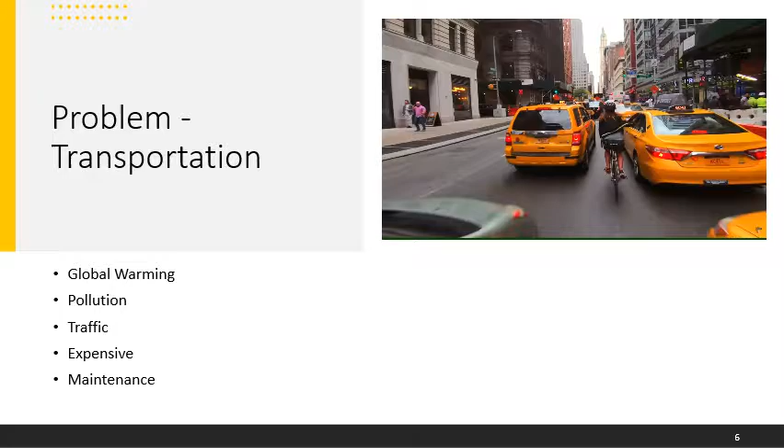Global warming is an issue that is trying to be resolved in many countries, but the main problem is that not many individuals take the initiative to go green. The main problem with cars in big cities like New York, and in our case, Los Angeles, is that they contribute to air pollution. Insurance and maintenance can be very expensive, and at times there are traffic jams where one can spend two to three hours. These expenses add up in an already populated and expensive city.

Although electric cars are already being created to mitigate some of these issues, they still are expensive for the average income.

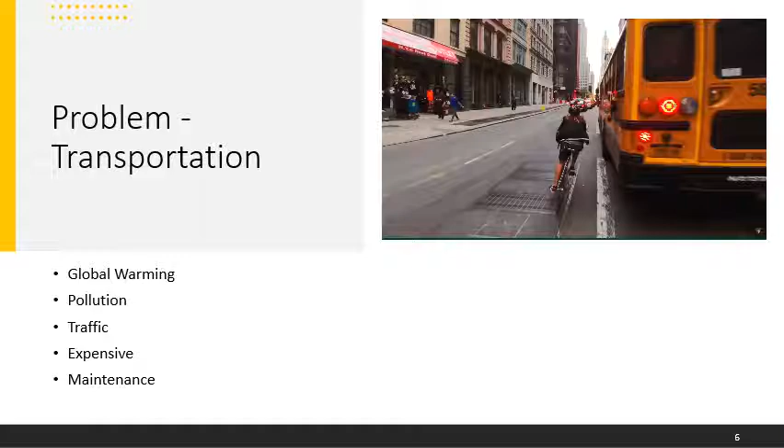The hybrid mobility device was designed to assist and improve a person's daily commute. In this project, the following mobility device will allow a person to travel from one place to another using renewable energy along with human power, which means that we are not only helping the earth, but also helping our own health and fitness. This hybrid mobility device will effectively utilize each source to achieve highest possible efficiency to be a cheaper and better alternative to cars.

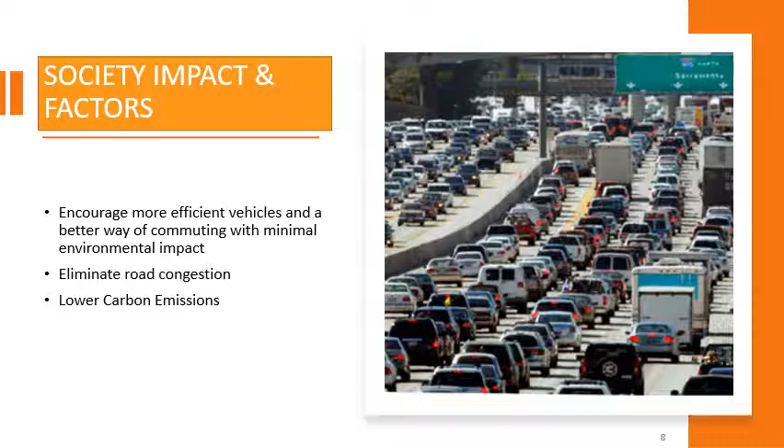Society impact and factors: as we know, the roads of Los Angeles are known to be some of the most congested in the United States, along with New York, San Francisco, and other cities. This project provides a solution to this problem. It encourages more efficient vehicles and a better way of commuting with minimal environmental impact. This vehicle can be a substitute for a commuter vehicle, a solution to decongest roads, which means that if there are less vehicles on the road, there will be lower carbon emissions.

The objective of this project was to create a lightweight hybrid mobility vehicle that would serve as an alternative form of transportation in bigger congested cities like Los Angeles and New York. One of the main goals was to create an eco-friendly vehicle, much smaller and slimmer when compared to our traditional car.

The goal of the power system team was to integrate three different power sources, including manpower, solar energy, and plug-in electricity. This will be achieved by using pedal assist, solar cells that would charge a battery and power a motor, and plug-in electricity that will charge a battery and power a motor.

The objectives for the mechanical systems team was to design a roll cage, perform finite element analysis on the roll cage and on the frame, and to lastly finalize the drivetrain.

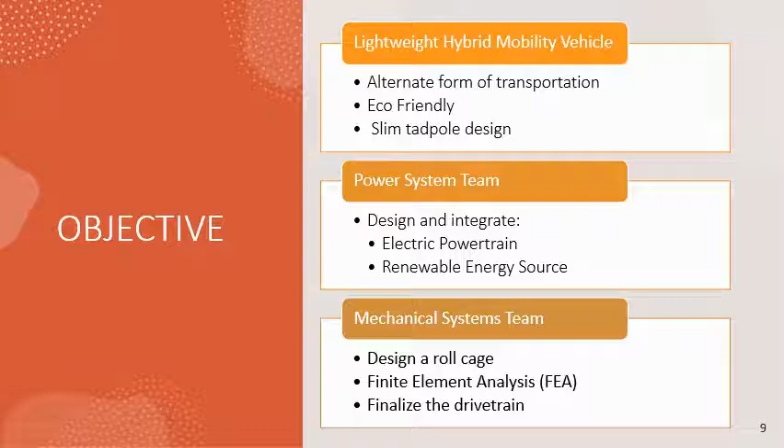I will now hand it over to Christopher to talk about the team management.

We will now go into the project management. We will talk a little about the team structure, along with how the work was divided amongst each team member, and how both teams were scheduled in order to stay up to date with any modifications that were made from both teams.

The mechanical systems team is responsible for the modifications done to the roll cage, along with the drivetrain design. Our senior design instructor is Mike Thorburn, and our advisor is Adel Sharif.

Abdullah Alshammari and Hussam Alzahrani were in charge of the roll cage, along with the seat and steering wheel design. Noemi Lucas was in charge of the finite element analysis, along with other calculations. Christopher Santiago and Christopher Perez were in charge of the drivetrain design.

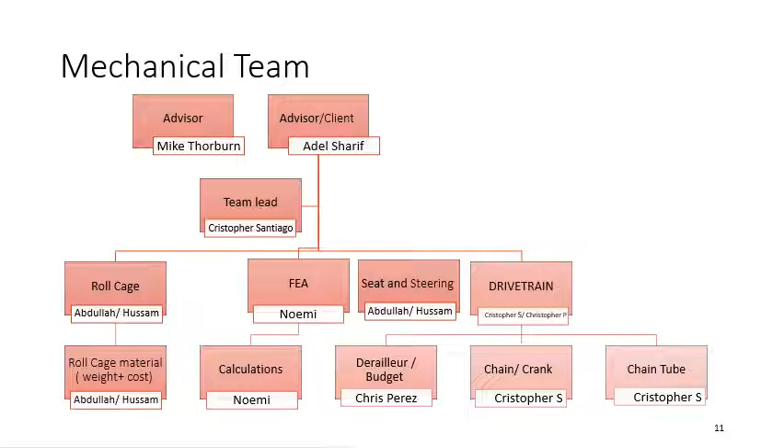For better time management, the mechanical system was concerned about time, and to make sure no member misses important due dates, the team decided to divide the project into 4 phases. In phase 1, the team researched and analyzed the main components of the project. In phase 2, each member was assigned a task so work could be divided fairly. The major accomplishment was that each member successfully delivered their required task so the team could assemble the parts together and implement them into the final design.

In the third phase, the mechanical system kept good communication with the electrical team to consider their needs in our design, such as space for the solar cells, battery housing, and the electrical motor. The main goal of this phase was for the team to have time to run tests and simulations on the design parts, such as FEA or other analysis regarding the mobility device, or redesign if needed.

Finally, the last phase is to present our design and research that was accomplished on the project.

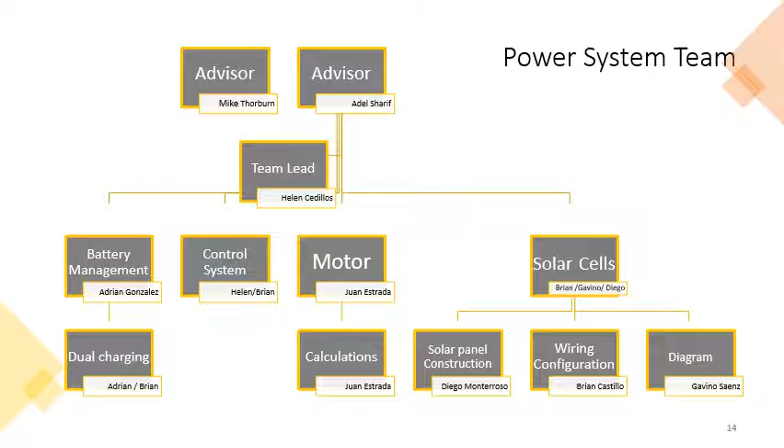The power system team is aware of the time constraint. To help better manage the time, this project was split into 4 phases. In phase 1, the team identified the main components of the electrical design. Once these components were identified, they were assigned to individual members so we could divide and conquer, and we started by researching all aspects of that component.

In phase 2, which was still in fall, the team started designing and reassigning roles for the tasks we began implementing into our design based on the research done. We maintained open communication with the mechanical team to acquire the area assigned to the solar cells, and also to know the exact weight of the whole device so the proper calculations for the motors could be implemented.

In phase 3, which started this spring, the team worked on electrical simulations and also on modifications as we added additional solar panels. We also created cases so components could be mounted properly and adequately into the hybrid mobility device. In phase 4 is where we present our research and design to the Senior Design Expo.

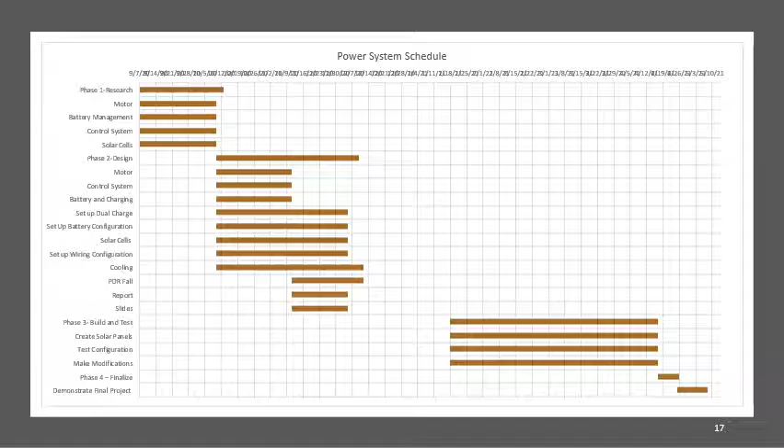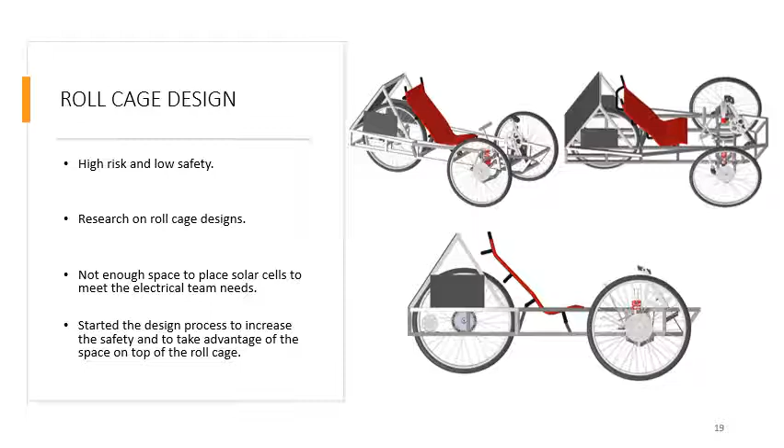The mechanical system team started the research process on roll cage designs to have an idea and build the best fit for this mobility device to meet the electrical team's needs and increase safety. The mechanical system team started the process of designing and building the roll cage, which will be presented by my colleague Hussam in the next slide. It's also worth mentioning that there were a lot of major modifications done on the roll cage design and the mobility device in general to accommodate the safety and electrical team needs.

The purpose of the roll cage is to protect the driver from being injured in an accident, especially in the event of a rollover. It's also to be able to place the solar cells on top, on the back, and on each side of the roll cage.

First, we had to come up with a concept design to guide us in designing the roll cage. We researched how roll cages are built and designed in order for us to successfully build one. Shown here in the pictures is the final design we came up with after many prototypes. This design helped us achieve the final design of the whole vehicle, shown from different angles.

We used mild steel material to design the roll cage and match up with the frame. The dimension of the roll cage tubing is 1 inch square with 0.065 inch wall thickness. One improvement we made was increasing the top space of the roll cage to place the solar cells. We were also able to make the edges of the roll cage curved, to minimize stress instead of having sharp edges, and to look much better.

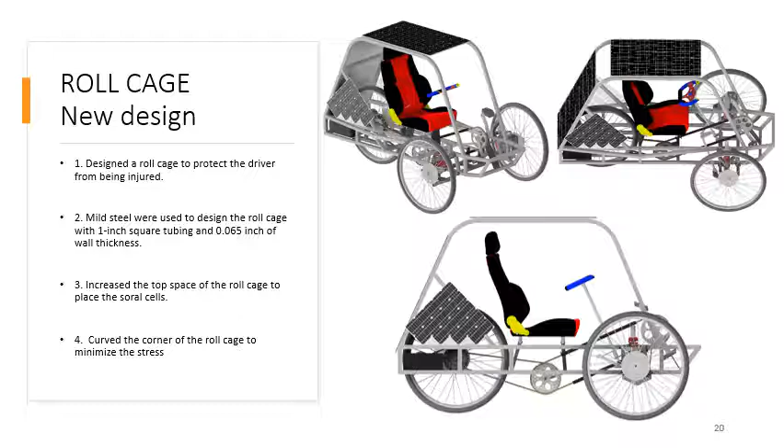Finite element analysis is used to predict the operation stresses and temperature that a component will experience. This analysis has been widely implemented by automotive companies and is used by design engineers as a tool during the product development process. If the analysis is done correctly, it reduces the time and cost of building.

The material selected during the analysis was mild steel, and multiple analyses were done on the roll cage, including front impact, rollover, and side impact.

Mild steel was the material selected for the frame and the roll cage. Seen in the picture on the right is the frame that was welded together using 1-inch square tubing. This material is primarily made up of steel and iron, and is commonly used in fabrication. It has been worked with in many ways for many years, so many practices and processes have been developed around mild steel, making it one of the easiest metals to weld.

Mild steel is also versatile. It's easy to maneuver and bend to your will, and it's less likely to crack, break, or be unwieldy to your demands. In addition, mild steel requires the least amount of personal protective equipment when working with it.

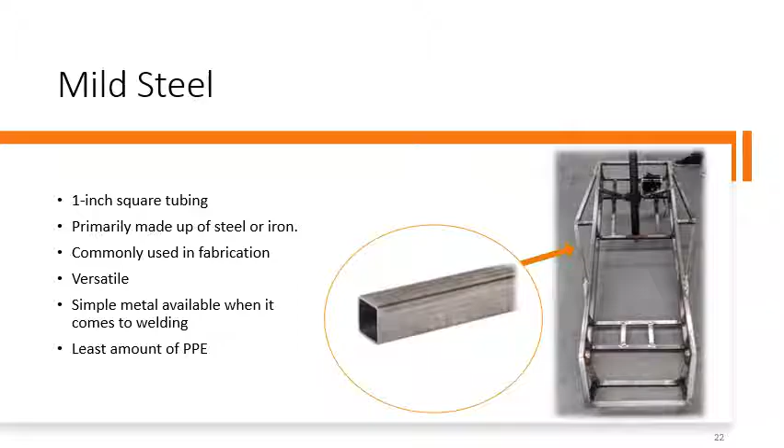Some of the pros of this material are that it's strong, light, easy to modify, easy to handle, and available at a variety of suppliers. One of the cons is that it has sharp edges. In order to do the front impact analysis, we had to calculate the impact force.

To do this, we use the total mass, which includes the driver's weight, to be 400 pounds, the initial velocity, which is 25 miles per hour, and then the calculated work done was 11,331 joules, with the impact time of 0.25 seconds, and the acceleration being 44.7.

The displacement was also calculated to be 1.397 meters, and the impact force was calculated to be 8,110 newtons, and this was distributed in 4 different locations. In order to do that, we divided it by 4, and located it where this red shaded temperature area is, and then the bottom one, and then these two little corners right here.

Now, we wanted to locate this force in the corners as it would impact the whole front, not just this part, but it also depends on the scenario too. The displacement was 0.02145 millimeters, and the safety factor was 7.27.

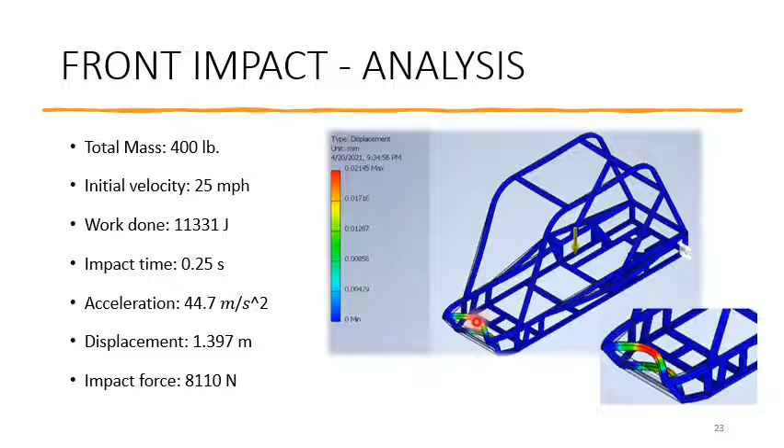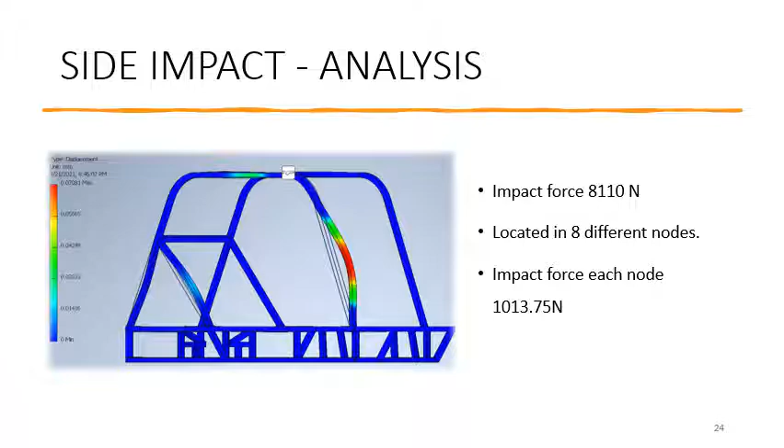The side impact analysis was done using the impact force of 8,110 newtons, which was located at 8 different locations in the side view, and the force for each location was 1,013.75 newtons. The results for the displacement was 0.0708 millimeters, and then the safety factor was 7.9.

The last analysis done on the assembly was the roll impact, and for this reason the roll cage was designed. The first image is where the impact load of 1,780 newtons was distributed in 8 different locations, where each location the force was 222 newtons. As the results showed, the displacement for this analysis was 0.08631 millimeters, and the safety factor was 6.64.

For the second image, the impact force was distributed in 4 different locations, where the impact force at each location was 445 newtons, where the displacement is 0.1881 millimeters, and the safety factor was 7.9. This goes to show, depending on where you locate your impact forces, how your results are going to come out.

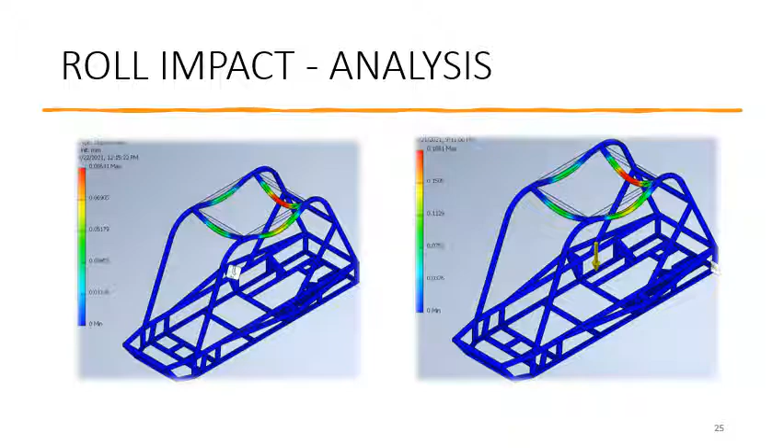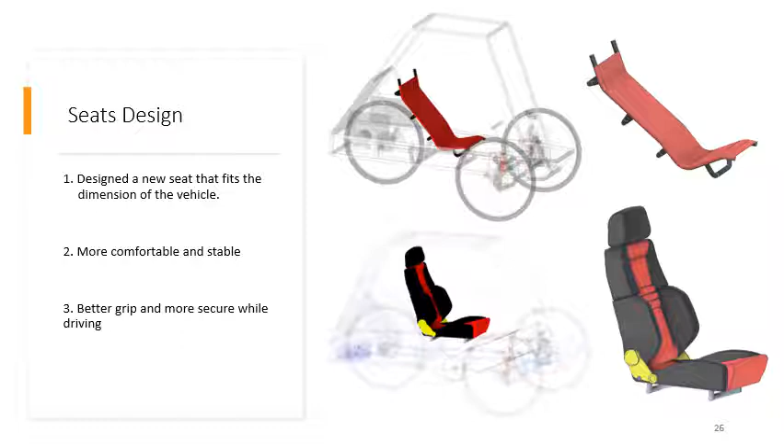To satisfy all these conditions and make the rear part accessible, we redesigned a new seat and made it a foldable chair design as shown in the figure below. The new seat design is more comfortable and stable, and gives the driver a better grip and more security while driving.

So the mechanical team tried to look for solutions to resolve these issues, and came up with raising the steering wheel to give clearance to the user for pedaling. Also, the team agreed to design a steering wheel that is 13 inches in diameter, which would allow the user better handling.

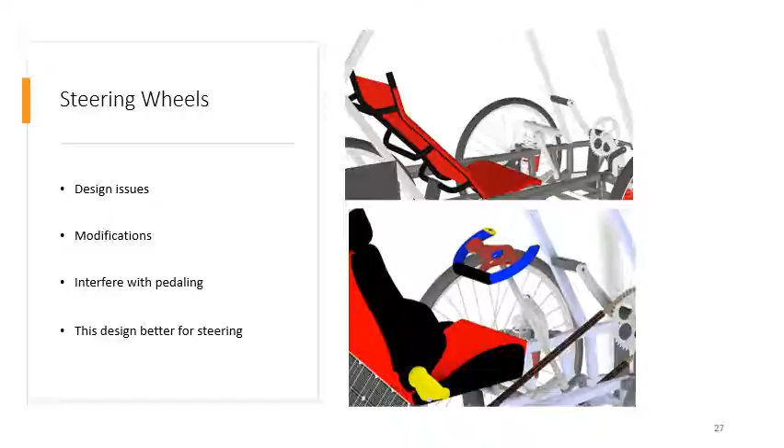Here we will talk about the suspension design, which consists of a double wishbone suspension, kingpin inclination, caster angle, and Ackermann steering. The kingpin is the most essential part of the suspension system because it connects the upper and lower control arms, the shock absorber, and the wheel together.

KPI is the angle formed by the wheel and a line between the center of rotation of the upper and lower control arms, which came out to be a 12.6 degree angle. Caster is obtained by offsetting the mounting brackets of the upper and lower control arms on the frame. The caster angle was set to 7 degrees. The caster is beneficial because it helps the wheels self-correct after a turn.

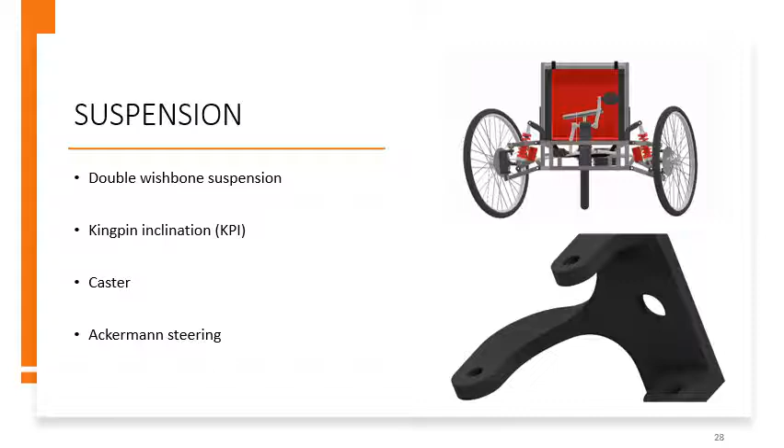The Ackermann steering was essential because the left and right wheels rotate about the same point, however their radii are different. I will now be talking about the drivetrain.

The components of the drivetrain are a crankset, rear derailleur, and a sprocket. The drivetrain of the vehicle includes a cassette with multiple gears in the back, which will allow the driver to pedal with ease if going up a steep hill by switching gears.

The motor will be connected to the rear wheel through a fixed sprocket. When looking at the previous design, we noticed there would be complications with getting the chain from the rear sprocket to the front crank, since the seat was interfering with the chain.

We decided to modify the drivetrain and incorporate 2 additional chain rings in the center of the frame, which would guide the chain under the seat to have clearance. We would then have to incorporate 2 additional chains instead of having a single chain connected from the rear sprocket to the front crankset.

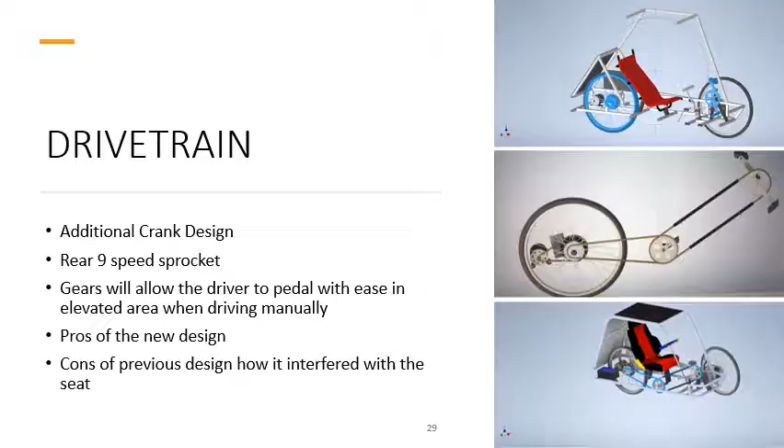Another incorporation to the drivetrain was a chain tube. We decided to incorporate a chain tube to protect the driver from having their legs scrape with the chain when pedaling. It would also prevent clothes or shoelaces from getting tangled with the chain and the front crankset. The chain tube will also protect the driver's clothes from the chain grease.

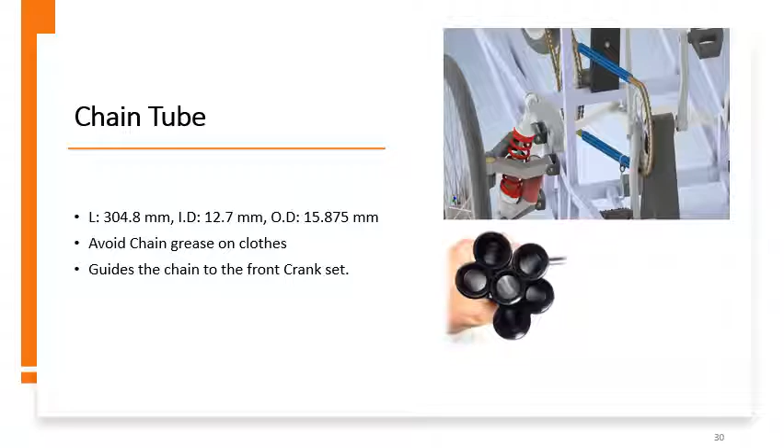The chain tube will guide the chain and keep it in line with the front crankset, which would have a less likelihood of the chain coming off the ring. The length of the chain tube is about 305 millimeters. The inner diameter is about 13 millimeters, and the outer diameter is about 16 millimeters.

The derailleur will be used to maximize the speed and efficiency of the vehicle when the person is pedaling. The derailleur also allows for the usage of the gears in the rear cassette, which come attached to our donor wheels. The derailleur is easy to install and adjust.

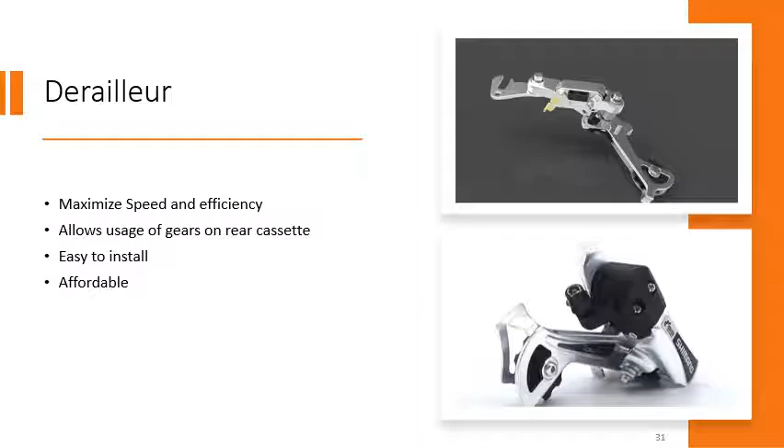Depending on clearance issues, it can be mounted directly onto the wheel or within a hanger that comes included. The mechanism itself is relatively cheap and can be replaced with any 9-speed derailleur if it comes to fail.

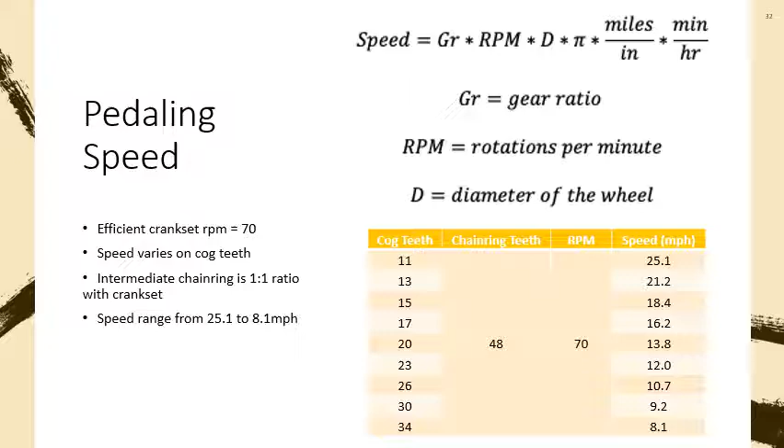There is an intermediate chain ring between the crankset and the rear cassette, but there is a 1-to-1 gear ratio, so it doesn't affect the speed whatsoever. The speed ranges from 25.1 to 8.1 miles per hour if pedaling at the recommended RPM of 70.

Now we will be moving on to the power system's electrical process.

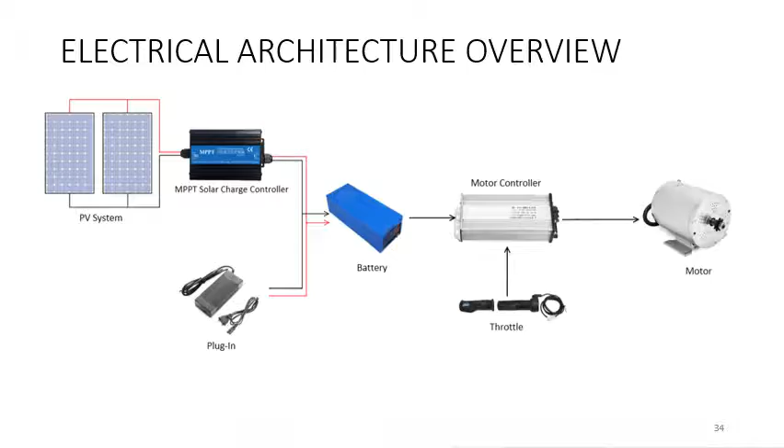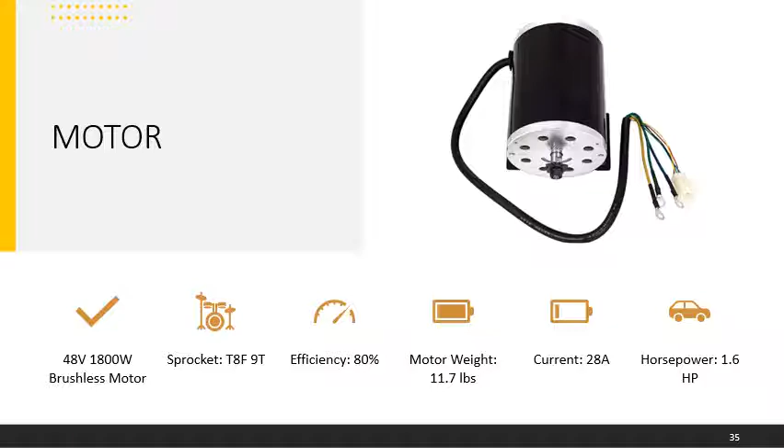Moving on to the motor and its specifications, it is a brushless motor with a voltage of 48 volts and a power of 1800 watts. It has a T8F9T sprocket, also known as an 8mm chain sprocket with 9 teeth. It weighs 11.7 pounds and has an efficiency of 80%. And lastly, it has a current of 28 amps and a horsepower of 1.6.

Some advantages this motor has are: it has a DC electrical current which only flows in one direction. It has easy speed regulation and can also be used for immediate start and reverse motions. And lastly, it is fed power directly from the power source and requires little to no maintenance.

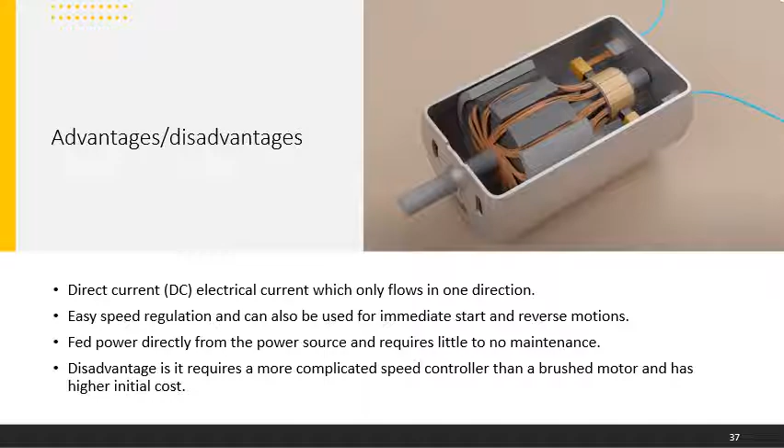A disadvantage this motor has is that it requires a more complicated speed controller than a brushed motor and has a higher initial cost.

2 lithium-ion batteries are being used within this project to power up the hybrid mobility device. Different adapters were viewed in regards to the charging system, and the prominent choice selected was an Anderson outlet connection. As for battery life, this depends on how much current is used by the motor, and charging time will depend on whether it is charged through standard or fast current, but usually takes anywhere from 9 to 10 hours.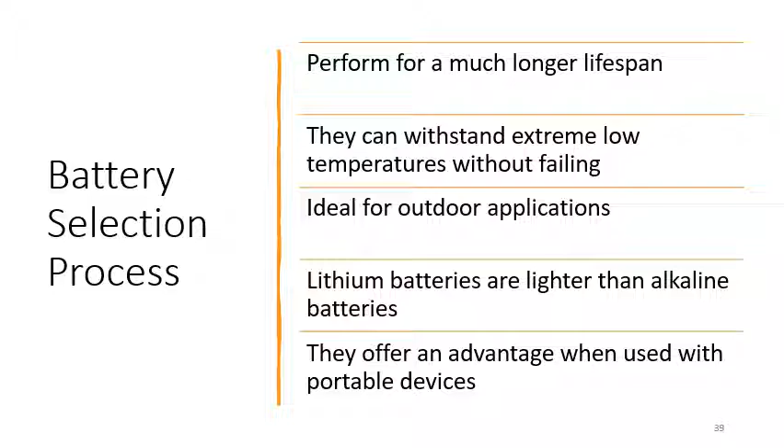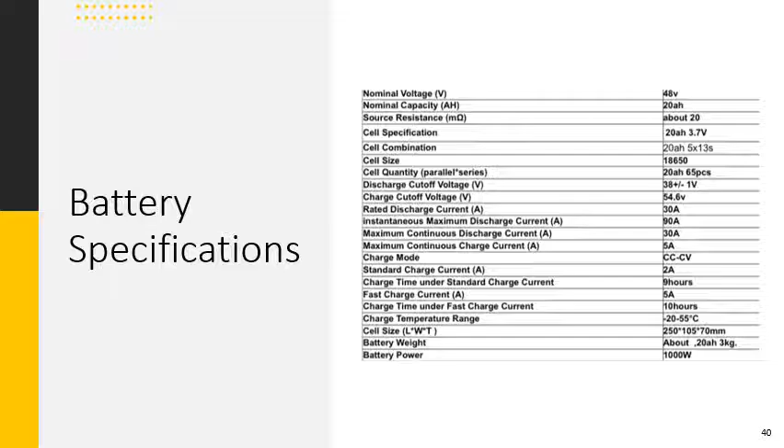Here we have our battery specifications, which include some specs regarding the battery, such as a nominal voltage of 48 volts, a nominal capacity of 20 amp hours, 1000 watts of power per battery, and an average charge time of 9 to 10 hours depending on the current of standard or fast charging.

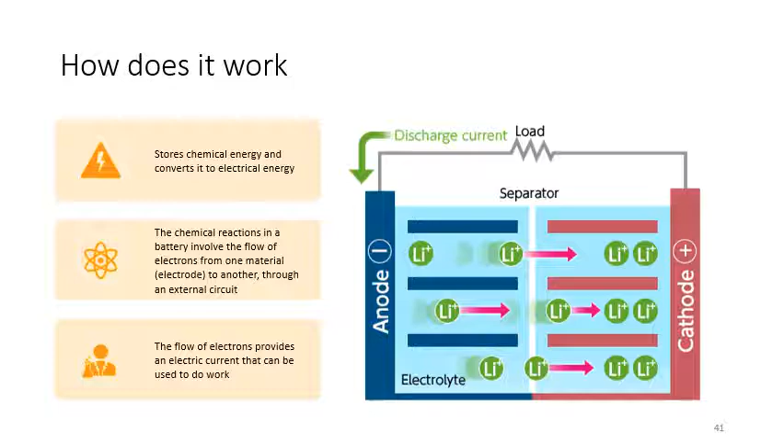How does this all work? Well, the electrolyte carries positively charged lithium ions from the anode to the cathode and vice versa through the separator. Then the movement of the lithium ions creates free electrons in the anode, which creates a charge at the positive current collector. The electrical current then flows from the current collector through a device being powered to the negative current collector. And lastly, the separator blocks the flow of electrons inside the battery.

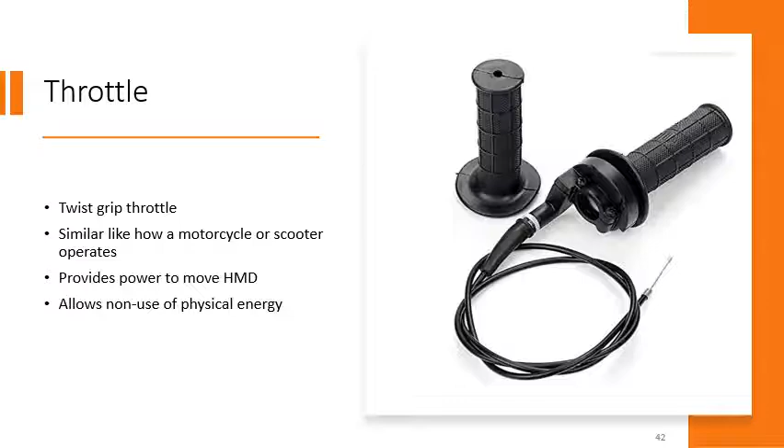The hybrid mobility device will use a throttle to regulate the speed of the hybrid mobility for those times where the user does not want to do any physical exercise, or when the user wants to just relax. The throttle is going to be a twist grip throttle, and it's going to work similar to how a motorcycle and electrical scooter operates. Once the throttle is engaged to the motor, it will provide power and propel the user and the bicycle forward.

Since there are varying components to this project, we need a manager. And for the manager, it's going to be the control system. The control system manages the varying input and produces a constant output. Without the control system, the motor will run continuously until the battery dies or until you manually take it off. The control system will be powered by the battery and manage the signal going into the motor.

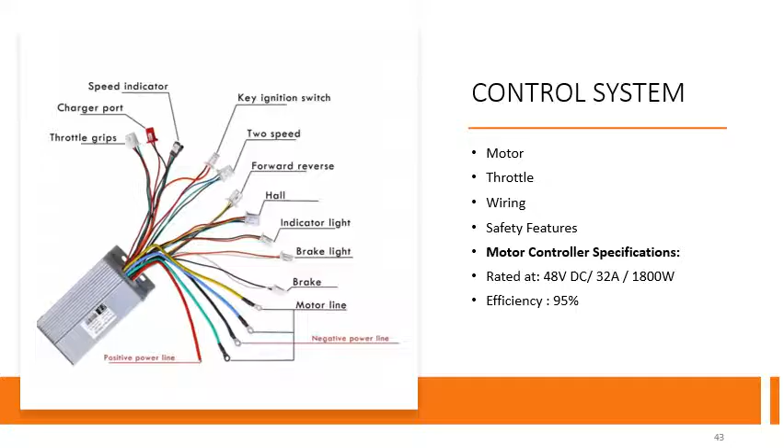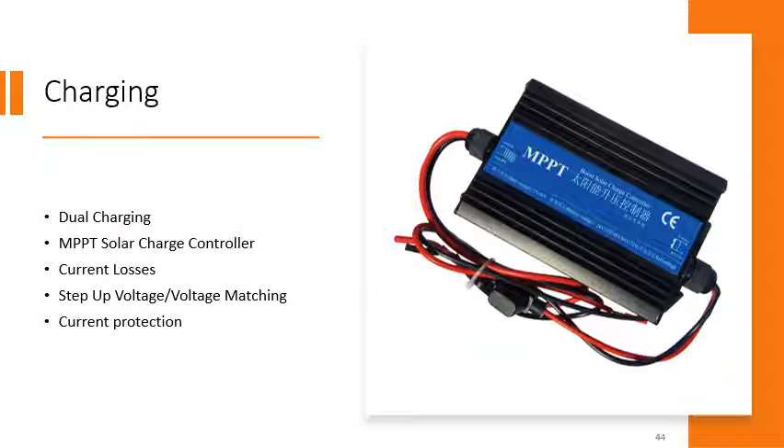Now, to continue with the charging of our system, we will be using a dual charging system using solar and plug via adapter from the batteries. To manage the solar charging, we will be using an MPPT solar charge controller. The solar charger controller will step up our voltage to 48 to properly charge our battery. However, stepping up our voltage will cause current losses. For example, if we step up the voltage in our current configuration, then we will be outputting 48 volts and 3 amps to keep our current rated power output, but our step-up voltage will be greater than the voltage to properly charge the battery, leading to more current losses and power losses.

So how do solar panels work? Well, simply put, a solar panel works by allowing photons, or particles of light, to knock electrons free from their atoms, generating a flow of electricity. Solar panels are actually comprised of many smaller units called photovoltaic cells, which, when linked together, make up a solar panel. Each cell is basically a sandwich made up of 2 slices of semiconducting material, which is usually silicon.

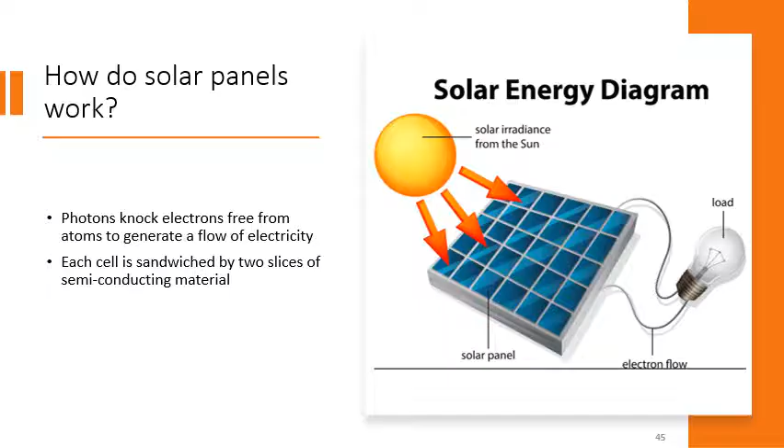Constructing a solar panel allows us to have flexibility over how we design it for certain applications, as opposed to buying them from manufacturers. In our quest to find solar cells, we came across 2 main types, monocrystalline and polycrystalline.

Monocrystalline cells are made from a single crystal silicon, leading to a more efficient cell. Since it uses one silicon crystal, it aids the electrons in having more room to move to generate electricity. Polycrystalline cells are made from multiple silicon fragments that are melted together, which will reduce its efficiency. Like monocrystalline cells, electrons need room to move, but since there are fragments in these cells, it reduces the space of the electrons, leading them to produce less power.

However, one advantage that polycrystalline cells provide is that they are much cheaper than the monocrystalline cells, which will be a more economical option and will be much cheaper to replace.

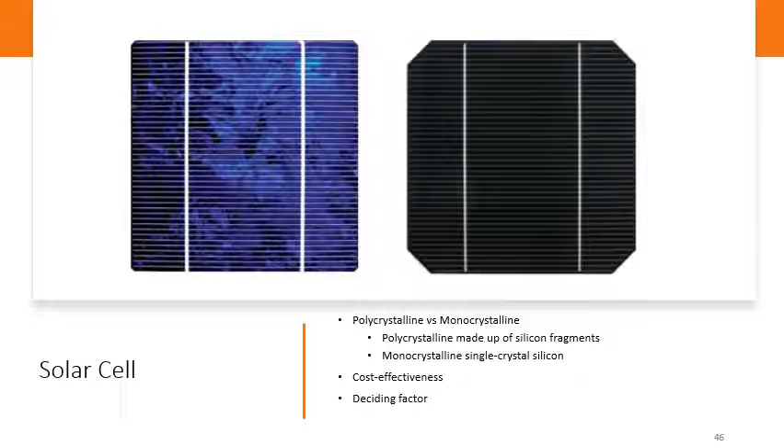For the purposes of the project, the chosen solar cell was a 3x3-inch monocrystalline cell because it's more efficient. Although they come at a price tag, it helped in reducing the area needed for the panel. The 2x3 polycrystalline cells that were considered fell a bit short. When considering polycrystalline, we saw that the rated power of our panels are smaller compared to a panel configuration using the 3x3 cells. Meaning, for the equivalent power needed for our project, the polycrystalline cells would need a bigger configuration, which would increase the area needed when mounting it on the vehicle.

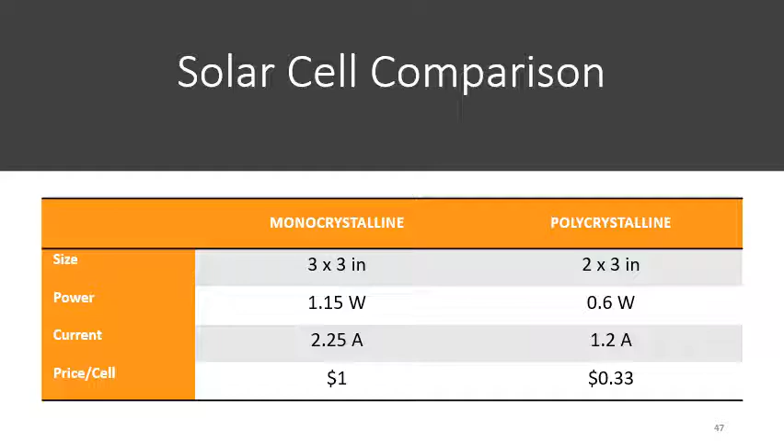Here is a small table comparing the previously mentioned cells. We can see that the power for the monocrystalline is 1.15 watts and 0.6 watts for the polycrystalline. We can also see that the current is higher for the monocrystalline cells. And at the very end, we have the price per cell, where the polycrystalline cells have the monocrystalline cells beat at 33 cents per cell.

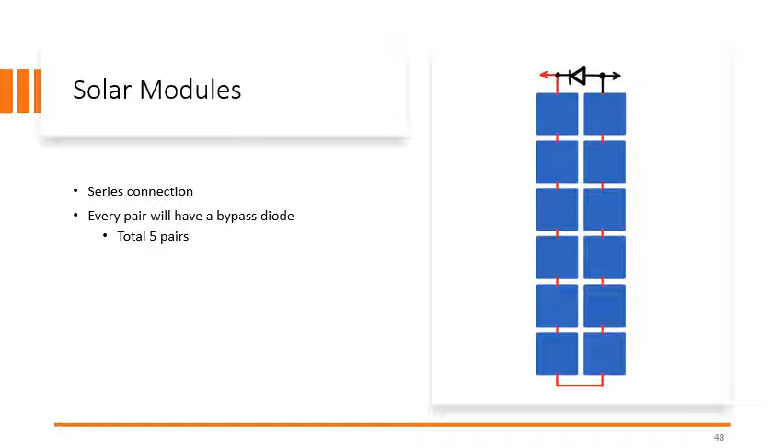To create our panel, each module contains 12 cells that will be connected in series, and each module will contain 1 bypass diode to maximize the amount of protection, making it a total of 5 modules per panel.

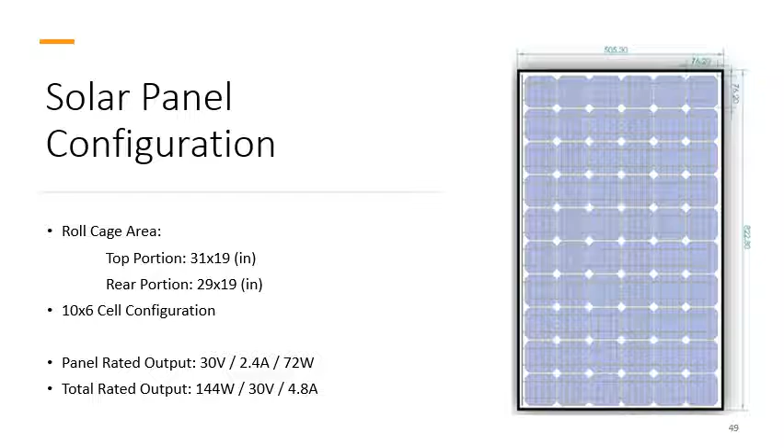To reiterate, both panels will have 5 modules consisting of 12 cells and 1 bypass diode each. Each panel will consist of 60 cells totaling to 120 cells. Each panel will have a rated output of 30 volts at 2.4 amps. Both panels will be connected in parallel, making up a part of our PV system. This will give us a rated output of 144 watts at 4.8 amps.

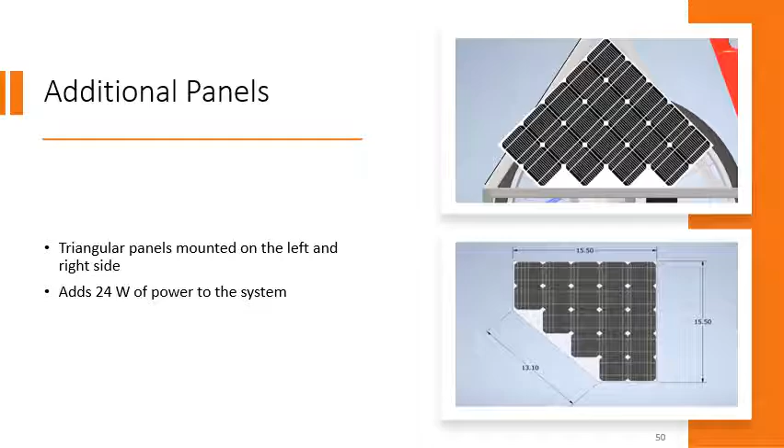When constructing our solar panels, there are two things we must consider, such as the thermal aspect and the use of diodes. The efficiency of the solar panel will go down if it's exposed to high temperatures. Typically, a panel exceeding 77 degrees can decrease its efficiency by 10 to 25%, so our power will decrease. To mitigate this, we had to figure out ways to help cool our system, such as the materials used to build it. Also, this is a moving vehicle, so air cooling is already a major cooling factor that is taken into account. For our second consideration, we are using bypass diodes, which will help improve the performance of our PV system.

If parts of our solar panels are shaded, the internal resistance of the cell will increase, causing current to drop in our panel, which can cause hotspots to occur, which will damage our panels. When shading occurs, the bypass diode will go into forward bias, allowing a constant flow of current into the next module that is unshaded.

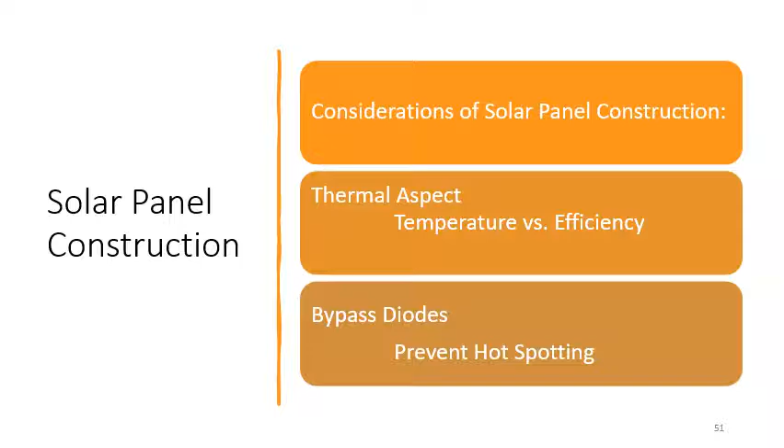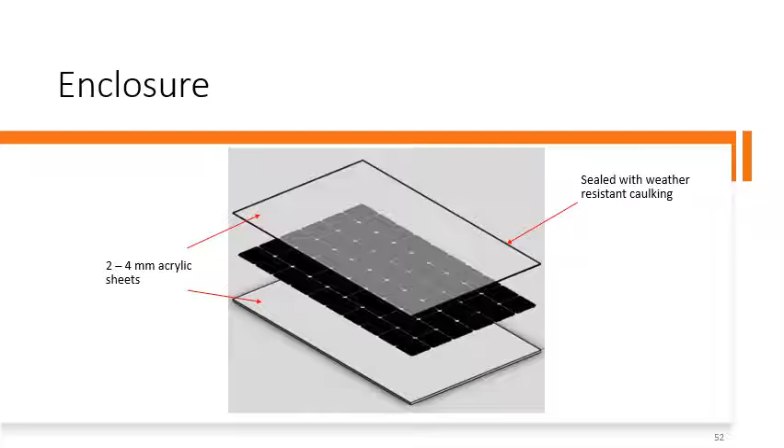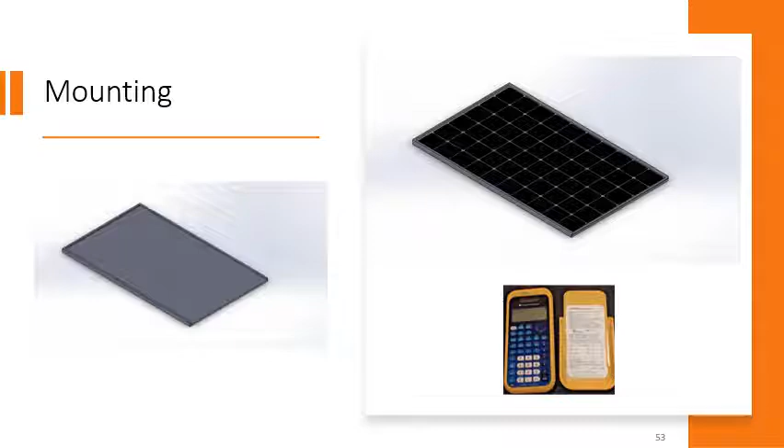For the enclosure, the use of 2 to 4 millimeter thick acrylic sheets would be used to sandwich the solar cells together, and then sealed with weather-resistant caulking. To mount the solar panels, it was decided to design a sliding frame, which was inspired by a calculator lid. It will make removing and replacing the solar panel much easier. The mount will be made from aluminum in order to maintain sturdiness of the solar panel and to keep it lightweight.

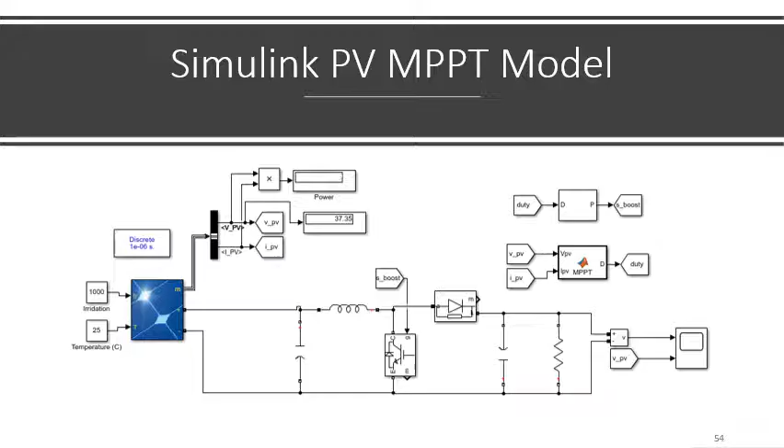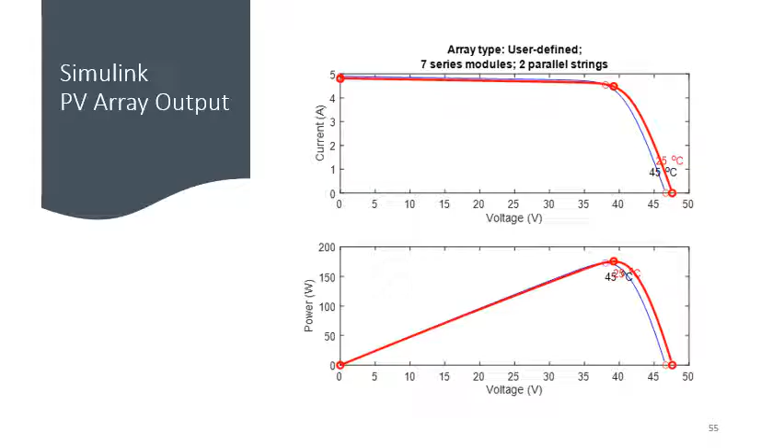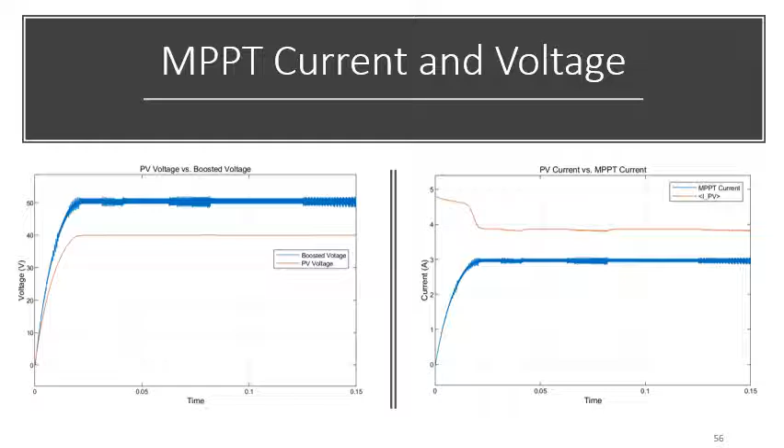Now we will be transitioning into the design assessment section of this project, which consists of potential risks our personnel will be under. When the time has arrived to put together this masterpiece, we will be working together under the same laboratory. Doing so will bring certain health risks, safety hazards, and physical damage to members of the team if protocols aren't followed, along with wearing the proper personal protective equipment. This can include things such as COVID-19, burns, eye damage, electrical shocks, cuts, and other serious injuries.

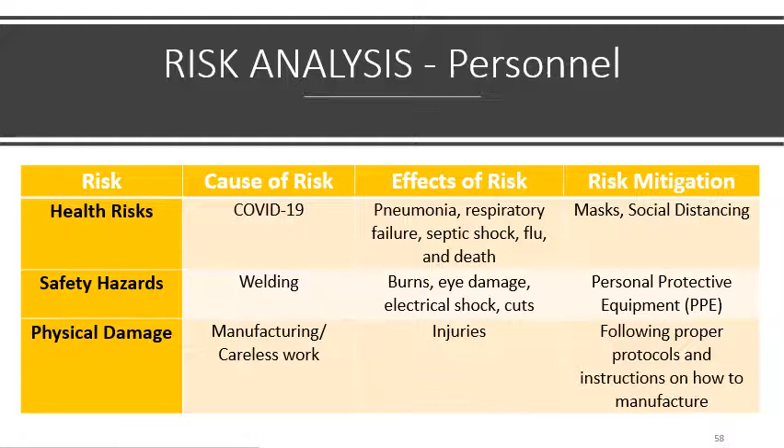As for the mechanical aspects of this project, there are also certain risks our members can possibly go through, which include the driver being injured or ejected in case of an accident, or simply an accident. These risks were mitigated by having a 3-point safety harness and designing a roll cage to increase the driver's safety. Other risks include potential fire and lack of stability, which were also mitigated.

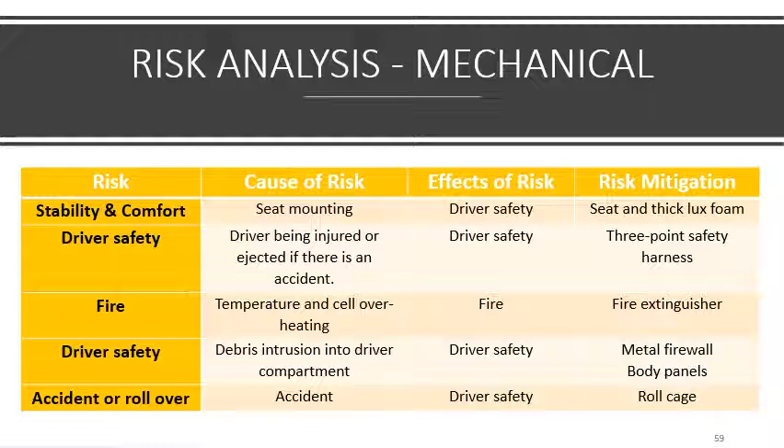For the electrical aspect of the project, there are also many risks that were taken into consideration, and these risks were mitigated. Some of the risks include overheating of the cells, which could cause fire or solar panel failure, and this risk was mitigated by including bypass diodes in the solar panels. Another risk is a possible lithium battery leak, which could be caused by a battery defect and can lead to symptoms such as nausea and vomiting. These risks are mitigated by storing the battery properly and inspecting it regularly.

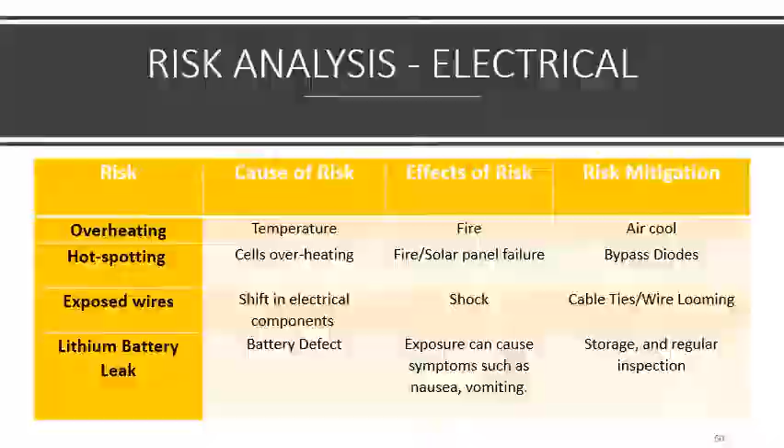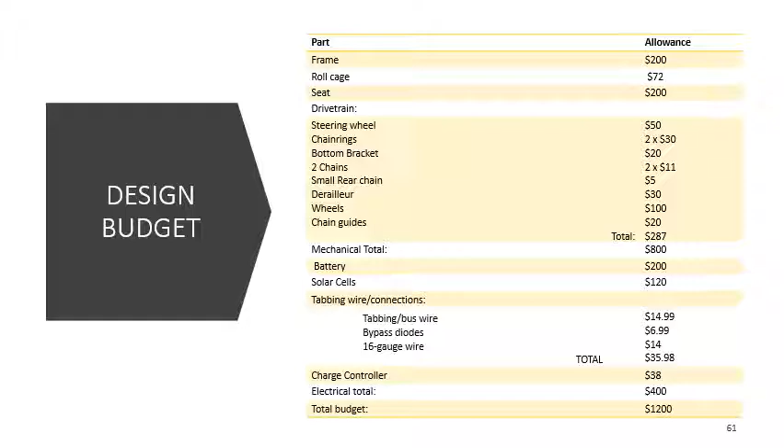Here we have the design budget. For different parts, we allowed ourselves a different budget. For the mechanical system side, there was a budget of $800, which includes frame, roll cage, seat, and drivetrain. For the electrical system side, there was a total budget of $400, which includes battery, solar cells, wiring, and charge controller. The total budget of the project was $1,200.

Overall, our goal for this project is to help the environment by designing and building a lightweight hybrid vehicle that uses different power sources, renewable energy along with human power. The hybrid mobility device will contribute to the environment by providing alternative transportation for commuters.

We were successfully able to design and complete the roll cage. Also, the FEA was completed and we were able to determine how much force the vehicle can sustain. We solved the issue of the drivetrain by raising the new seat design and by adding an extra chainring and bottom bracket below the seats. Also, we were able to find the right solar cells to support the current battery and mount the solar cells on the roll cage.

Both the mechanical team and the electrical team had a major contribution to completing the design of the hybrid mobility device, in which we were able to make modifications such as finding the appropriate solar cells, modifying the roll cage design, and designing the drivetrain.